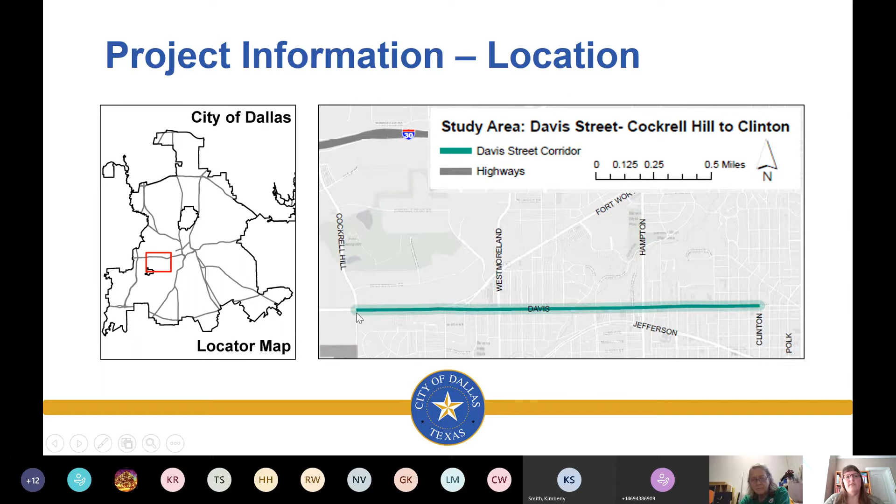So for our agenda, we'll talk about the project information, existing conditions and operations, proposed operations, your input into the process, our next steps, and then the contact information for the project. So the project itself is located on Davis Street between Cockrell Hill to Clinton, and it's in the Oak Cliff area. As you can see, as I'm pointing here, here's our Oak Cliff area and Davis Street between Cockrell Hill down to Clinton.

So City of Dallas bond dollars and the Dallas County Major Capital Improvement Program will be funding reconstruction of Davis Street with bicycle facilities between Cockrell Hill and Clinton. Currently we're in the conceptual planning phase, and it includes defining the project goals, identifying issues and opportunities, evaluating alternatives, and determining the horizontal roadway alignment, which includes the number of lanes, sidewalk width and those type of things, and also developing schematic plans.

And the conceptual planning phase will essentially help prioritize the order for specific segments to be improved within the corridor, since the entire corridor will not be improved at one time. What you can also see at the bottom of this slide is the entire process for a project, and you can see that we're in this project scoping and conceptual planning phase, this second spot here.

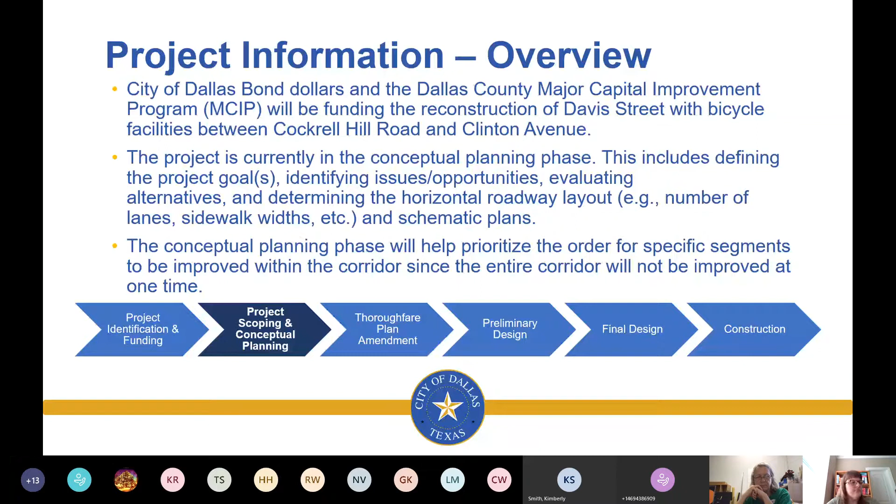So looking at the overall project area and relationship to other Davis Street projects, this project itself is our bond project and our partnership with Dallas County between Cockrell Hill over here to Clinton on the end. We do have a 2012 bond project that was done basically between Clinton and Beckley. It added sidewalks, on-street parking, and lighting, and we did complete construction on this just this year.

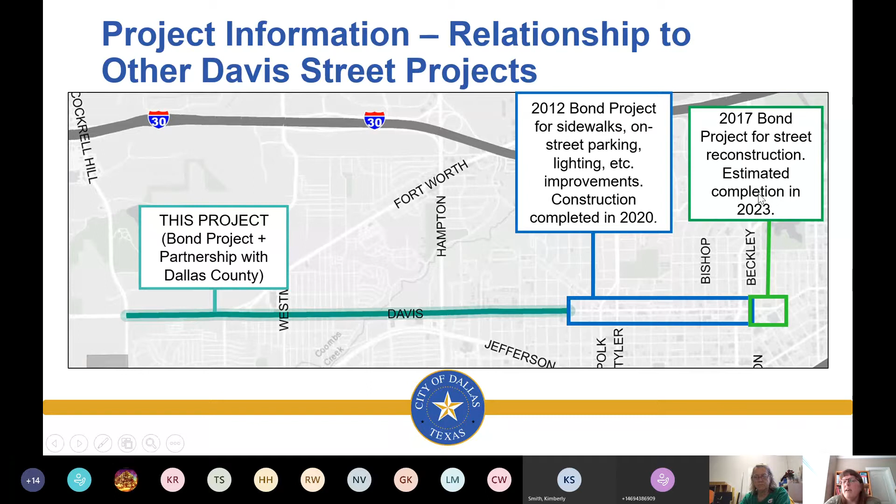And we do have a 2017 bond project planned for reconstruction east of here between Beckley and Patton. And basically the design is due to be done at the end of calendar year 2020, and estimated overall completion is due to be in 2023. So talking about our existing conditions and operations, first we'll talk about land use, we'll talk about the existing roadway operations, then some crash data and the bicycle network.

So the first map we have here looks pretty busy, but what we're trying to show you here is the land use that's within the corridor. And the red here is commercial. So we have a lot of commercial as we're coming from the west end of the corridor, and then we have some still kind of intermixed in here. We have a lot of orange in here, which is multifamily residential, and then the yellow is single family residential. So we have a mixed use corridor, which has defined sections that could require different cross sections to meet the needs of the corridor as we're going through this.

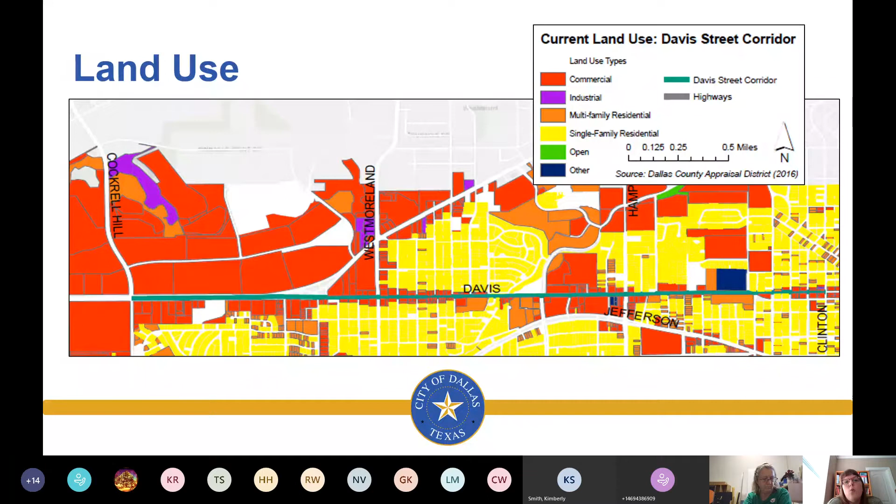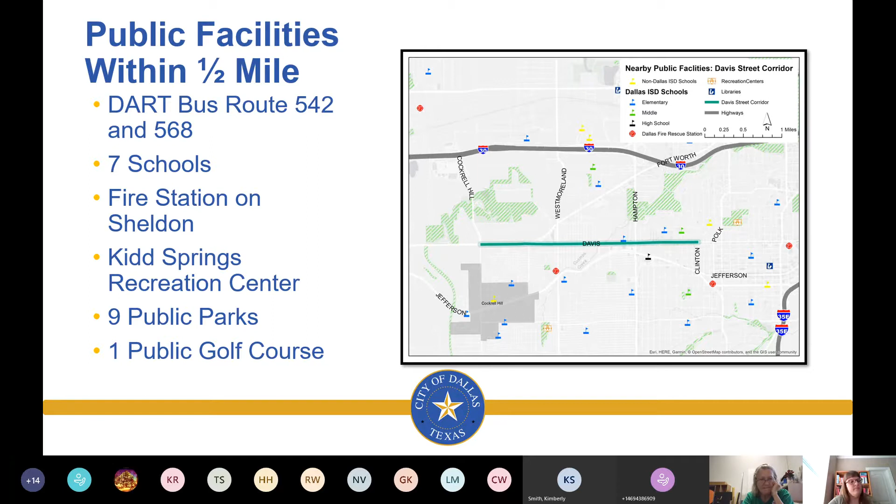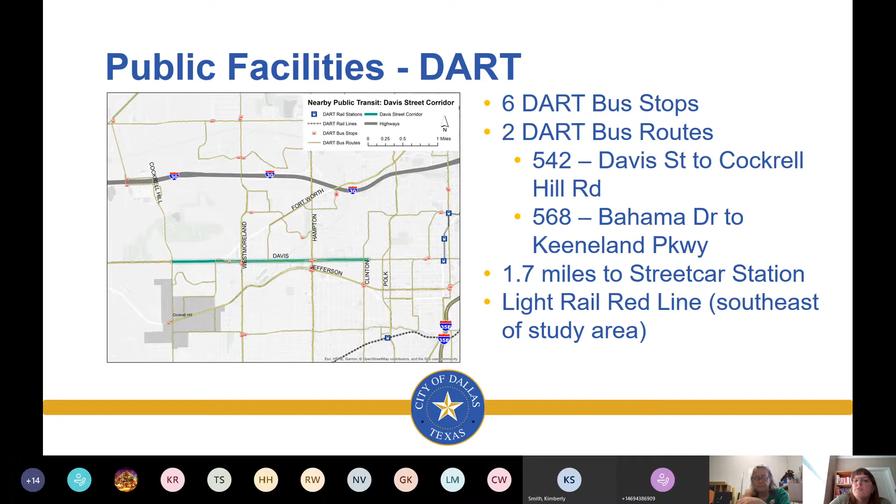We also have a lot of public facilities which are within about a half mile. We have the DART bus route 542 and 568. We have 7 schools. We have a fire station on Sheldon. The Kidd Springs Recreation Center is nearby. There are 9 public parks and 1 public golf course. And also looking at our public facilities, our DART facilities, we have 6 DART bus stops, 2 DART bus routes. We're 1.7 miles to the streetcar station, and the light rail red line is just southeast of the study area.

So looking at this very busy slide, what it is essentially showing is within the corridor, we've divided the corridor into segments. Segment A is between Cockrell Hill and Fort Worth, as you can see my cursor up here. Segment B is between Fort Worth and Westmoreland. Segment C is between Westmoreland and Hampton. D is between Hampton and Mary Cliff, and then E is between Rosemont and Clinton.

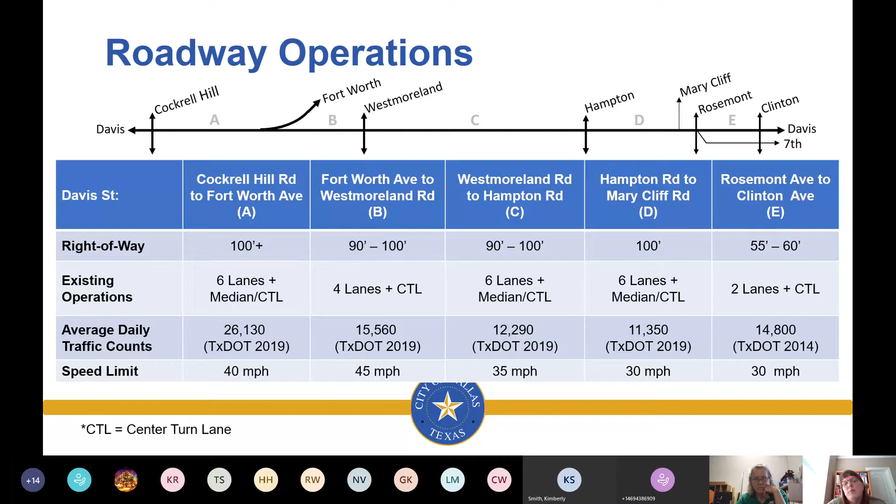So what we've put in the table is some condensed information to show what the right-of-way width is in each segment, to show what the existing operation is in terms of how many lanes they have, if there's a median or if there's a center turn lane. We've put the average daily traffic counts in each segment, and then also the speed limit. So there's a lot of information on this slide, but it's really to condense information so people can go back and reference it in a condensed format later.

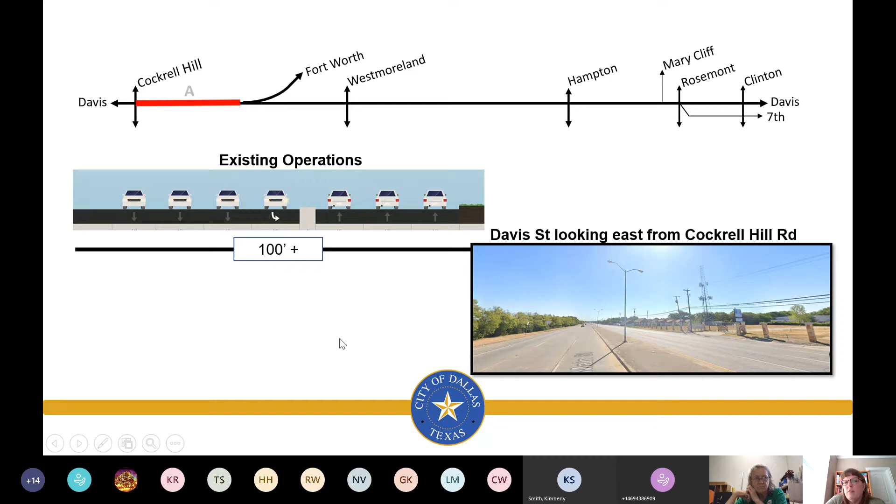So looking at our existing operations between Cockrell Hill and Fort Worth, essentially we have over 100 feet of right-of-way in this area. So we do have 6 through lanes, 3 lanes in each direction, and we do have a left turn lane. So you can see by the picture in the lower right what that looks like right now. And we'll go through these one by one to show you what the existing operations are.

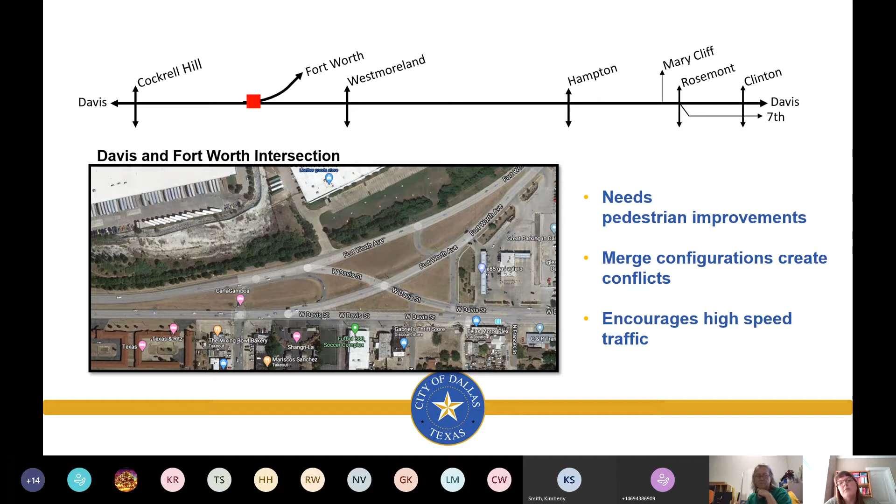So at the Davis and Fort Worth intersection, this intersection currently does not have pedestrian access, and it was really designed to make sure we move traffic through the intersection. So as you can see where my cursor is, we have a lot of merge configurations, and these create conflicts with the existing traffic and it also encourages high-speed traffic. So we'll be looking at this intersection to see what improvements we can make for pedestrian access and also to eliminate some of these conflicts and to slow traffic down a little bit.

So looking at the section between Fort Worth and Westmoreland, we also have, can whoever just joined the meeting please mute their microphone? Thank you.

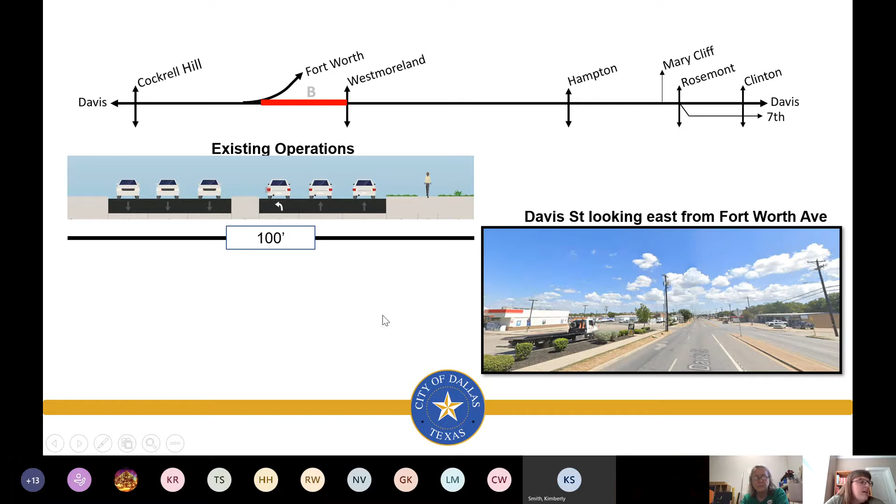So between Fort Worth and Westmoreland, we also have 100 feet of right-of-way. You can see in the picture in the lower right that we have 3 through lanes coming westbound and we have 2 lanes going eastbound, and there is a left turn lane. And this section is actually preparing to drop an eastbound lane for the next section of roadway.

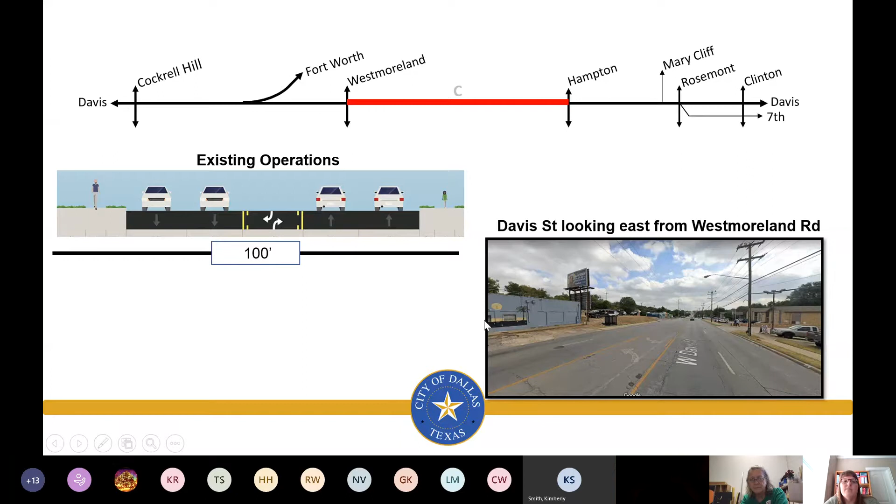So coming to Westmoreland to Hampton, again, we have about 100 feet of right-of-way. And we actually have 4 through lanes in this section and a center left turn lane. So you can kind of see the representative picture in the lower right.

And looking east from Hampton Road, again, we have about 100 feet of right-of-way. And we have 6 through lanes. And there is sidewalk on the south, and there are often cars parked on the south as well in this area, just to kind of make a note.

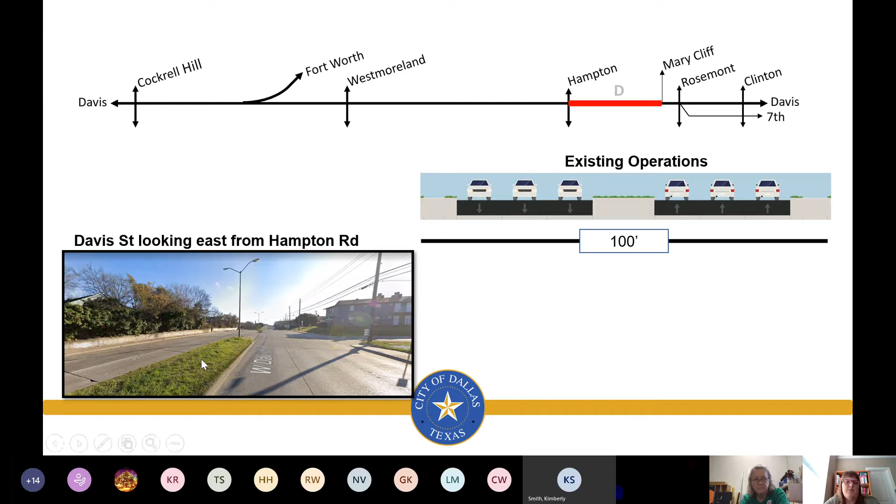At Mary Cliff, the roadway changes going eastbound. It drops to 1 lane, and westbound adds 2 lanes. And at Rosemont, we actually have 7th Street, and 7th Street has been closed to vehicles. So we have some issues we need to work through in this area of how we're going to deal with the transitions in here as well.

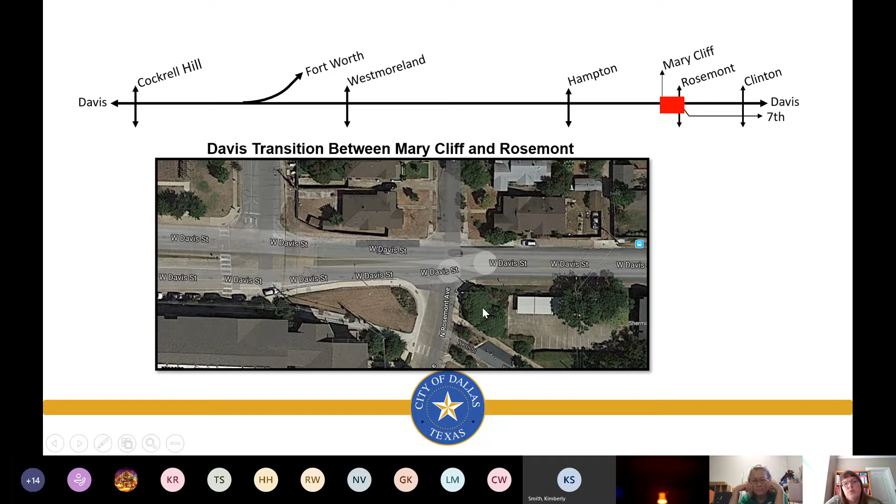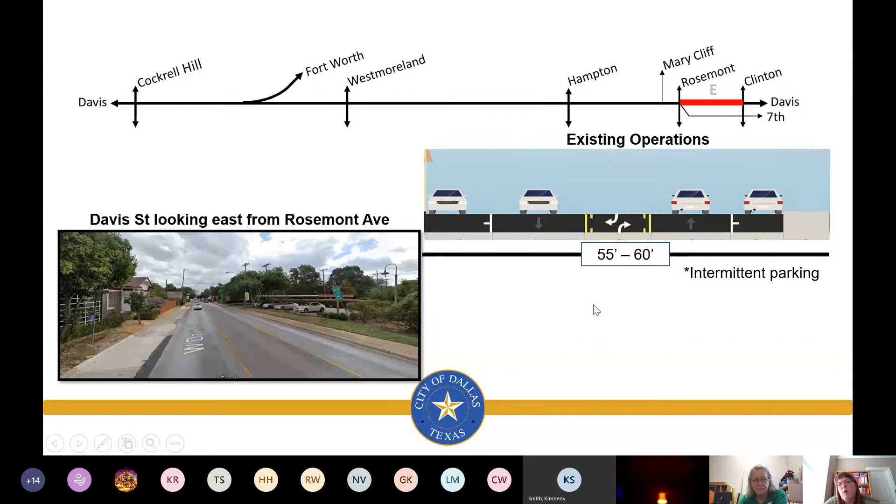And then looking at Davis from east of Rosemont, we currently have basically 1 lane in each direction and intermittent parking and about 55 to 60 foot of right-of-way.

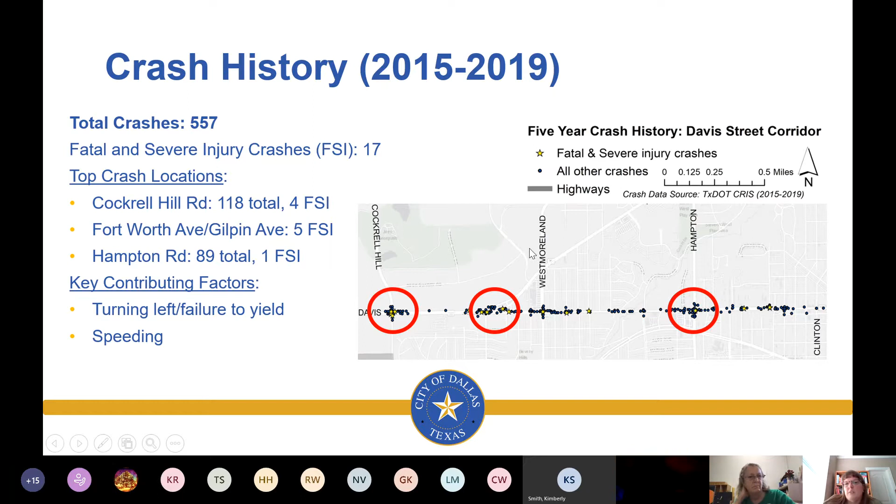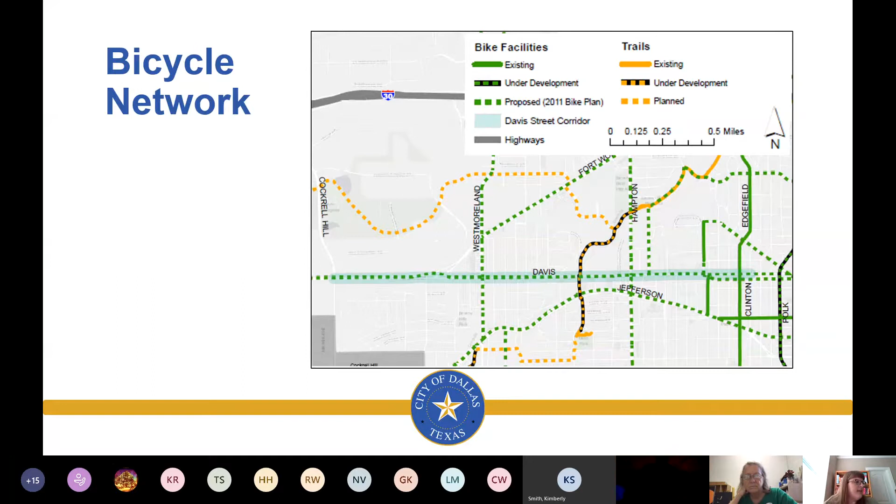And some of those key contributing factors to those accidents are failure to yield while turning left and then speeding. So some of these things are those things we're trying to address as part of the study to look at how we can improve safety and reduce crashes as well. This project in Davis is also on the bicycle network and the bike plan, and it connects to several existing proposed bike lanes and bicycle facilities.

So to just kind of summarize our existing conditions, for land use, Davis Street between Cockrell Hill and Westmoreland, it's commercial and light industrial. Between Westmoreland and Clinton, we have more mixed use commercial and residential, and that's kind of what we showed you on that land use map that had those nice red, orange, and yellow colors. We have right-of-way changes pretty much between Cockrell Hill and Mary Cliff. We have about 100 feet of right-of-way, and between Mary Cliff and Clinton, that reduces to 60 feet of right-of-way.

And to explain, right-of-way is essentially the area that we have to construct the roadway, sidewalks, utilities, and those type of things. It's essentially the area of the roadway and the facility that the city owns. We have safety improvements that are needed at the intersection of Davis and Cockrell Hill, and also Fort Worth Avenue and Hampton. And as we just mentioned, Davis Street is on the 2011 bike plan, so we do need to include bicycle lane accommodations.

So looking at some of our preliminary improvement options in the 100-foot right-of-way sections between Cockrell Hill and Mary Cliff, the 60-foot right-of-way sections between Rosemont and Clinton, and then the Davis Street and Fort Worth Avenue intersection. I do want to note that these cross sections are preliminary and conceptual for illustrative use only. We just wanted to show you some examples of what we could do out here to get your reactions.

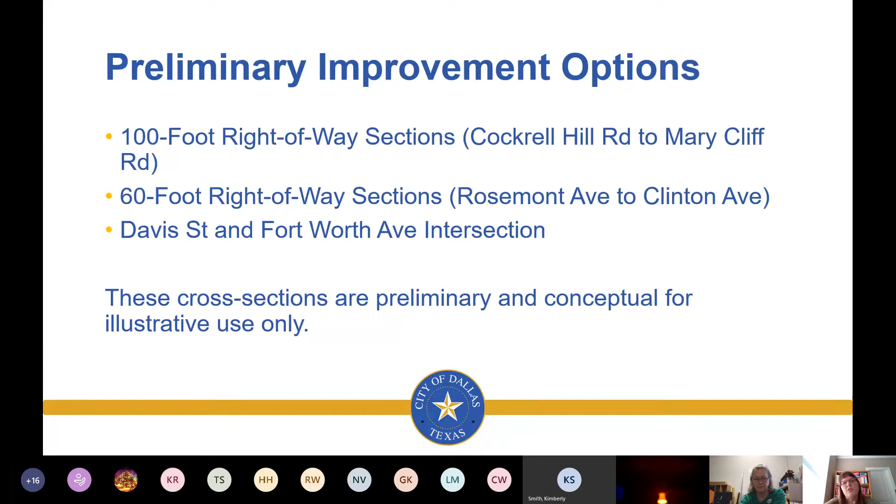So looking at option 1 for the 100-foot right-of-way sections, which as we said was from Cockrell Hill to Mary Cliff, essentially we could do a shared use path on both sides, which would basically include 4 travel lanes. We would have a 15-foot median with a center turn lane and 12-foot shared use paths on either side of the roadway there. I want to note that trees are shown here, but they're really placeholders for utility poles, signs, lighting, and they may not be installed as part of the future reconstruction project, but they're just there as placeholders.

Our second option in here is to have both sidewalks and bike lanes. We would still have 4 drive lanes. We would still have a 15-foot center median, but we would have buffering on both sides here, this little 2-foot buffer, and 6-foot bike lanes. And then we would include a 6-foot sidewalk on both sides.

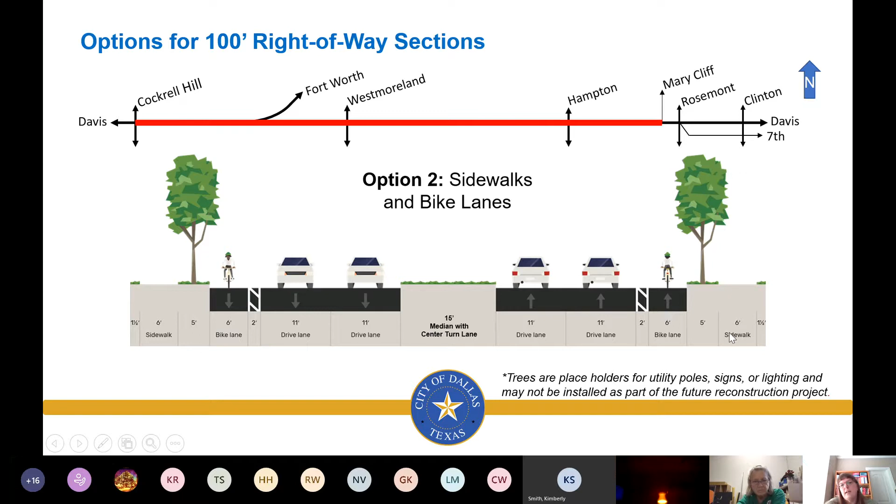And a third option could be a shared use path on one side and parking on one side. Again, 4 travel lanes, we keep the median. But in this one, we would have a 6.5-foot sidewalk on one side. We'd have a shared use path and then a parking lane. So again, these are illustrations to show you possibilities of what we could do.

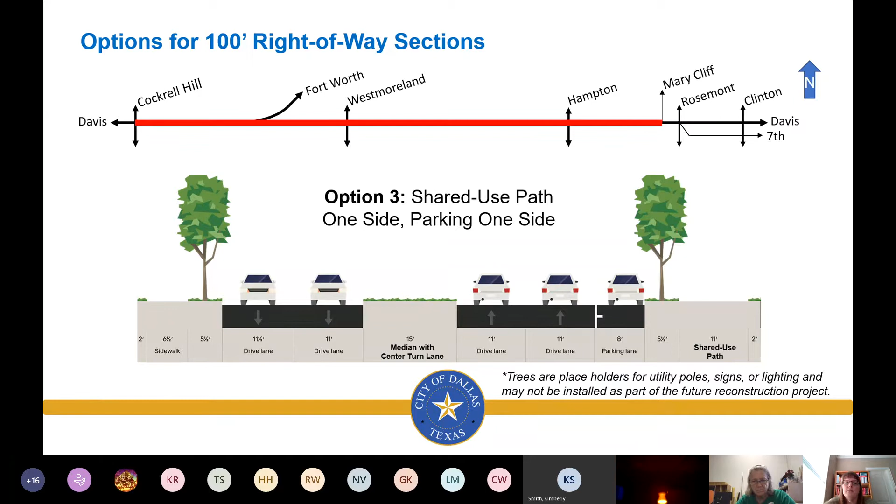Looking at the 60-foot right-of-way section, again, some different options. We could have bike lanes, one travel lane in each direction with bike lanes. Option 2 down here on the left shows parking on one side. So basically a drive lane in each direction, the turn lane, and then a parking lane. And then option 3 could be parking on both sides.

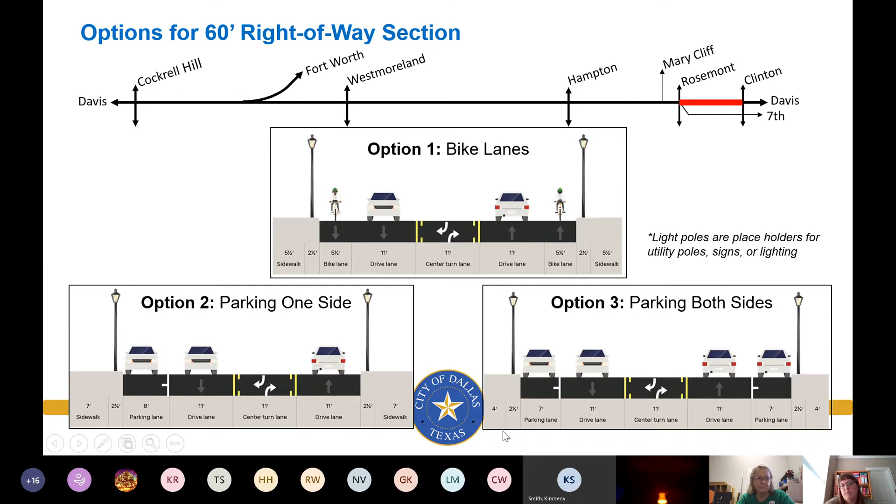And looking at the Davis and Fort Worth intersection improvement options, we have a couple different options. One would be to make this into a T intersection, and you can kind of see from the various colors here the direction of traffic. You would have southbound Fort Worth coming this direction, westbound Davis and eastbound Davis, and then northbound Fort Worth going this way. And another potential option would be a roundabout.

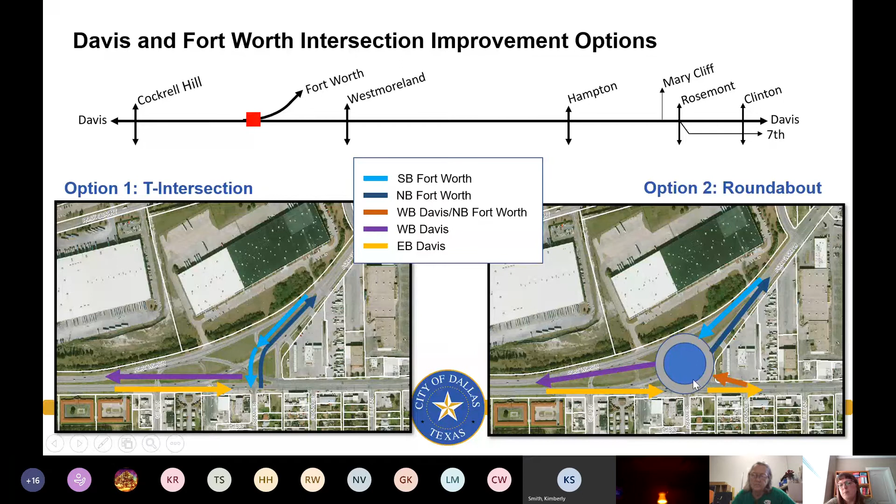And this location actually lends itself very well to a potential roundabout because we do have a lot of land in the middle here, which you can see over here. And it would also help to create much less confusion with movements. So these are a couple of potential options for the Davis and Fort Worth intersection.

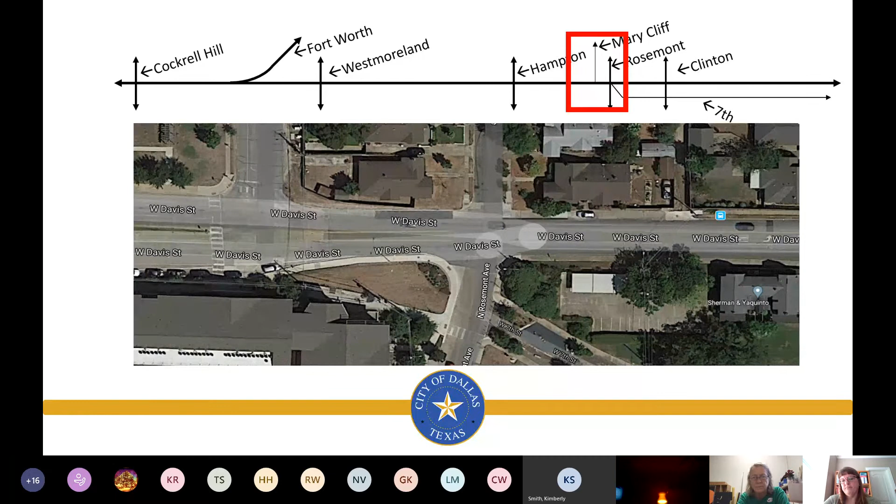So what we're looking for is your input. What do you like about Davis Street? What should the goals be for this project? What preliminary options do you prefer? What other improvements would you like to see made to Davis Street? And some of those potential improvements could be crosswalks. It could be traffic signals. It could be that you like shared use paths and sidewalks, or you don't.

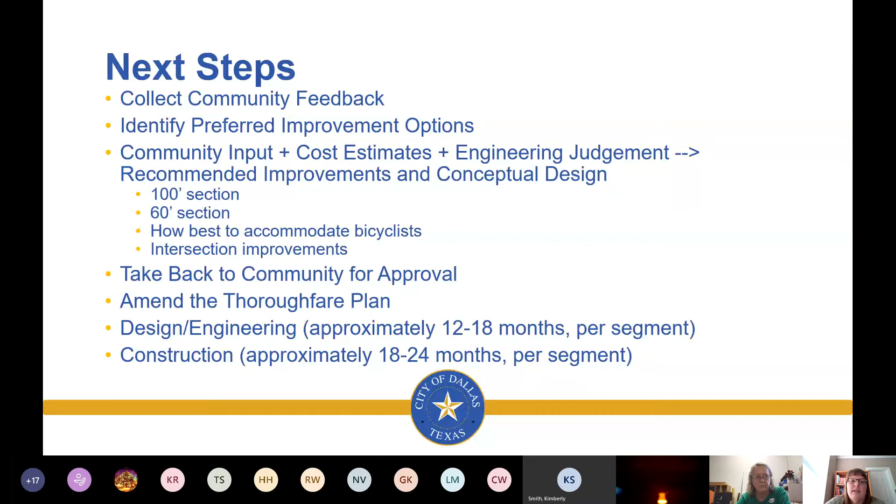So I just want to let you know this is not a short process that we're embarking on, but the first step is conceptual engineering and the conceptual planning here, and make sure that we understand what it is the community wants to see on Davis Street and that we incorporate your feedback into that.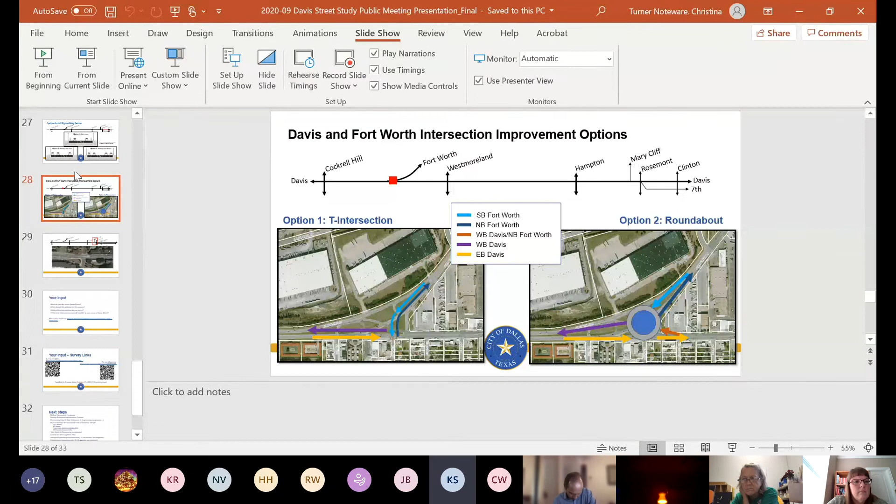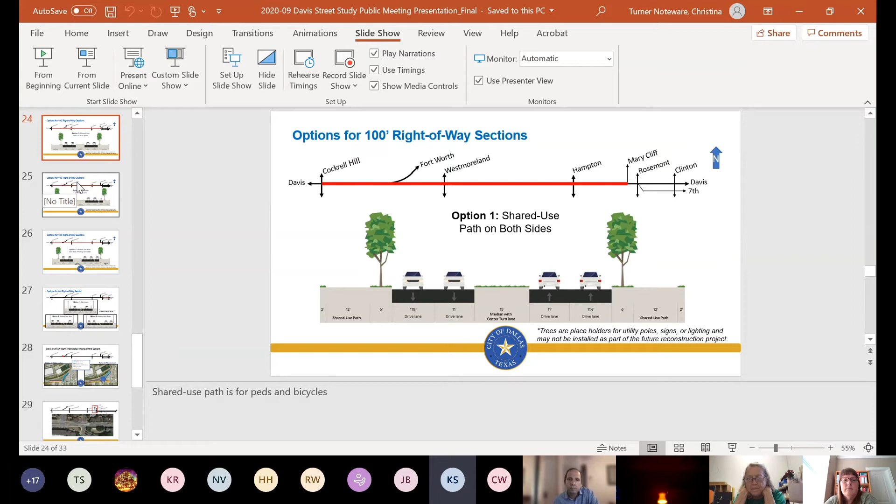In that area, Chris, do you still have the presentation pulled up? Do you want to pull up the cross section just so we can kind of see what we're talking about? There we go. Okay, so these are the options being proposed in that section between Rosemont and Hampton. It's not just for Rosemont to Hampton, we're proposing it for consistency in the entire corridor. So in that particular section, it does widen to 6 lanes.

Currently on the south side of the street, I believe there is parking for the apartments. They tend to park on street since there is kind of a lane drop right there. But reducing that area and making it a smoother transition is the whole goal of this project. We want to make it possible for you to cross the streets, hopefully along the entire corridor.

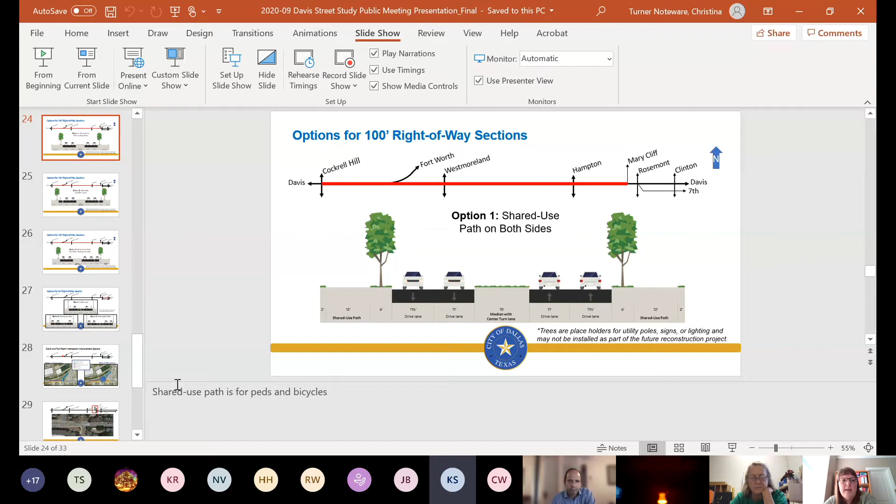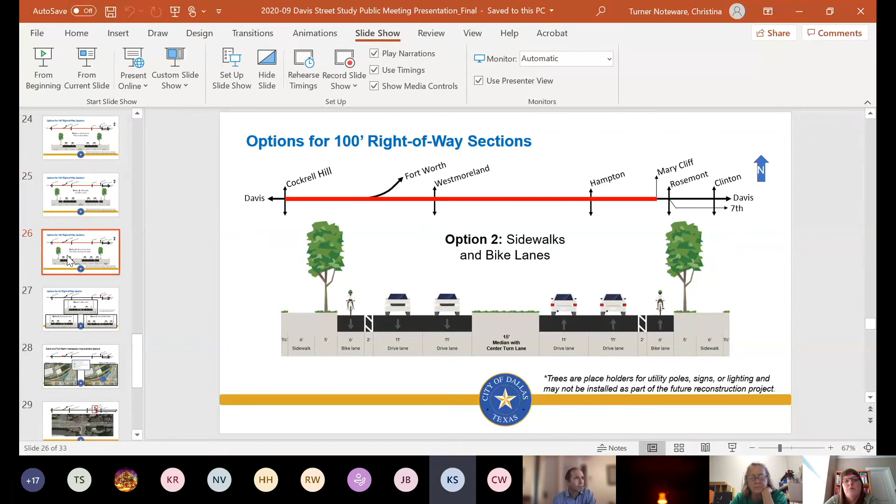So another question that just came in. Between Westmoreland and Hampton, there are so many businesses, will there be a median in that area, not a center turn lane as there is now? What we have in these options, what I currently have on the screen, is that basically, yes, we are proposing a 15-foot median with a center turn lane. So turn pockets would be dedicated at specific locations, and there would be a median in this area. And that's being shown in all three options as a 15-foot median with a center turn lane being proposed.

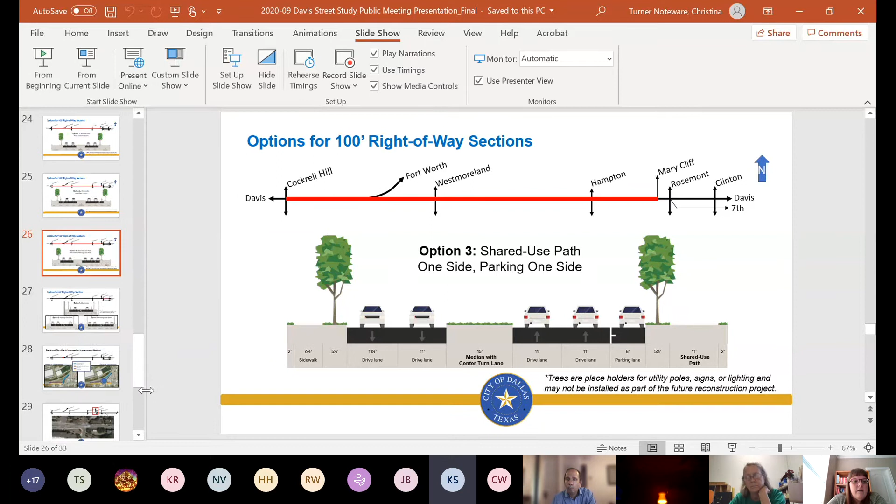Another question that came in, when is the estimated construction date? And how long is each section estimated to take? Okay, let me come back to this last slide here. So basically, the study itself, we're anticipating is probably going to take us another 6 to 9 months to complete. And at that point, we'll have a prioritization for our design and engineering. We need to work with our partner, Dallas County, in terms of the programming for the individual segments. But as you can see, each segment will probably take approximately 12 to 18 months to design, and then approximately 18 to 24 months to construct. So you're likely not going to see construction on Davis Street for probably another couple of years in the area where we were doing the corridor study.

Thank you. And then the next question is, racing activity intervention would be greatly helped by lane reduction at Hampton, similar to the reduction beyond Rosemont. Is that part of the decision equation? It is definitely something that we can look at. If you give us that comment, it's something that we'll look at as part of the study and see if it can be accommodated. Thank you.

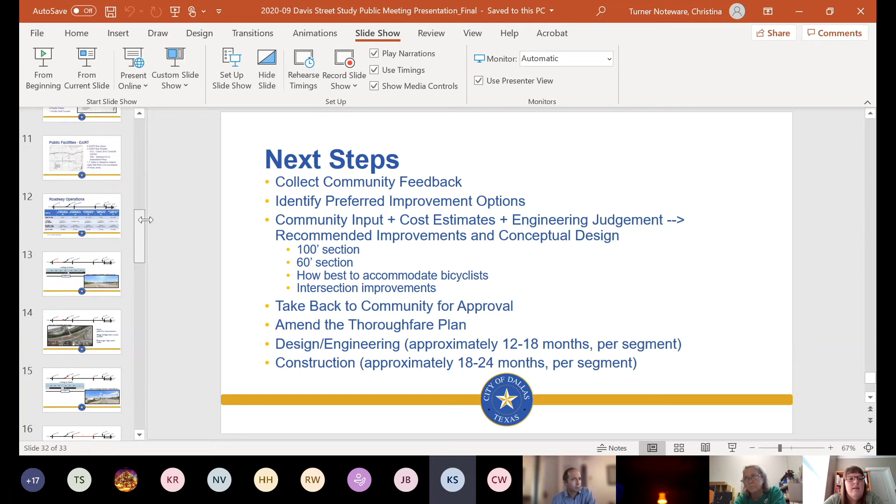And the next question, has there been any thought given to shifting to only 2 lanes from Hampton to Rosemont? I'm coming back up here just to bring up the traffic data that we have. So looking at the traffic data that we have, we'll have to examine that in conjunction with the other operational characteristics to see if it's something that we can do with 2 lanes or not. It's something we're open to looking at, definitely.

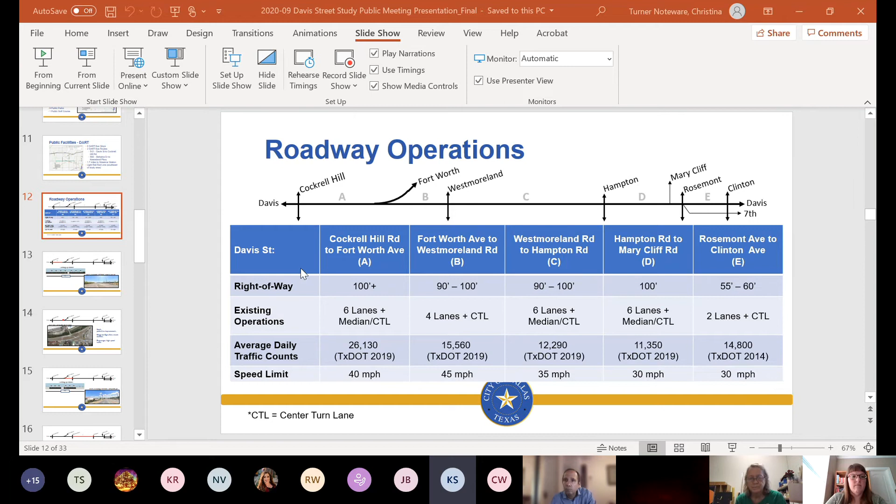Okay, and there's no more. Butch, did that answer your question? I'm not seeing any more questions. We can open it up. Chris, do you want to put on that slide that shows the survey? Yeah, absolutely. Let me get back to the very last one here. There we go. Sorry, that one. Yes. So if you guys look at that real quick, I'm pulling up the current results. We currently have 86 respondents for that survey.

So that is excellent. These QR codes, you can scan them with your cell phone, just cover up on your screen the one you don't want to scan, turn on your camera, scan it, take the survey, share it with everyone. I know this is a very active community. I can only hope that we could reach more with the survey, and any feedback on the website, or it's not really a website, it's a blog site, but on the blog posting, which was on your cards that we mailed to almost 1,400 people. You also have a link to that, which provides another comment form.